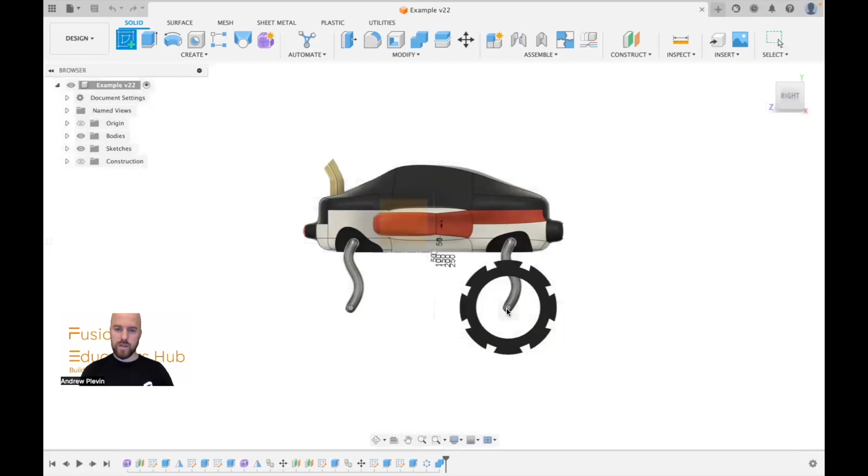Now that we've got the tyre done, we can start to work on the actual internal wheel and the trim. Again, same as before, we're going to create a sketch on the edge of this wheel axle. Zoom in and get it into position to make our lives a little bit easier.

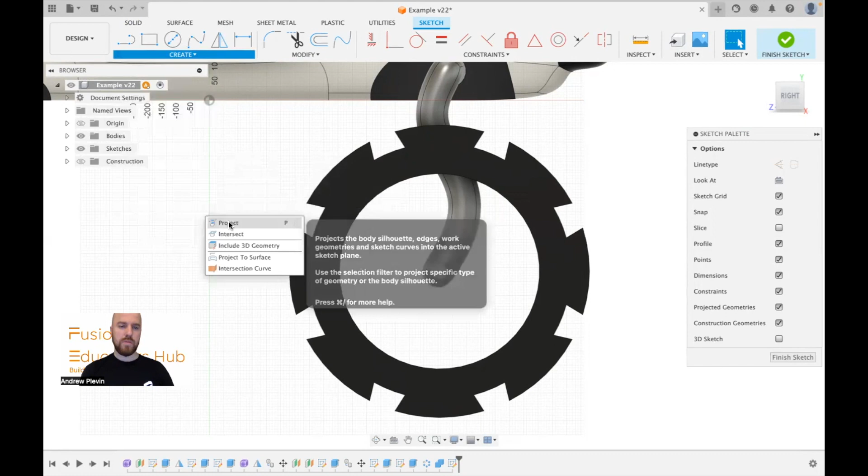We want to use some of these edges that already exist in this sketch. To do that, I'm going to go to create, project, and select those we want to include. We want the inner edge here and also this wheel axle. Click OK. Now we can use these within our sketch as actual sketch objects rather than just edges that exist on other bodies.

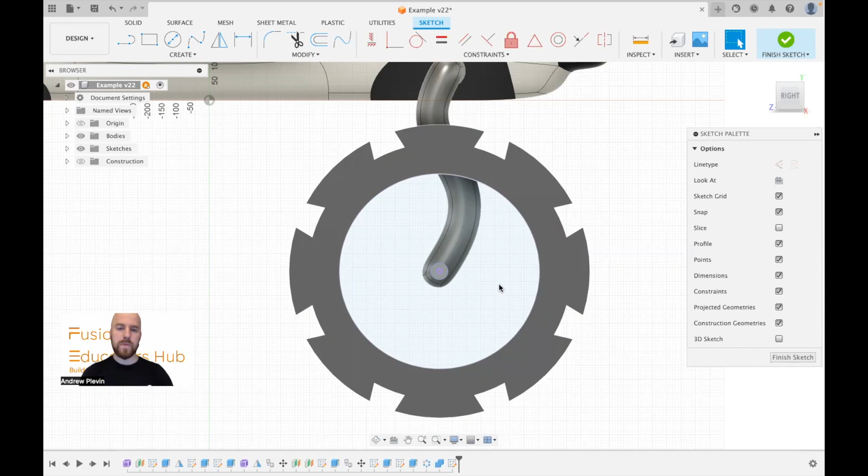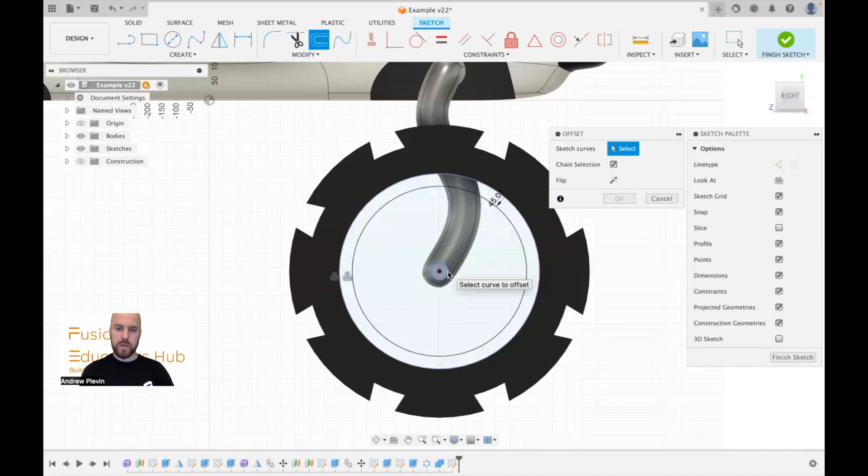So we're going to use the offset tool once again. We're going to create an internal offset just a little bit in, about 45, and click OK. Another offset, but this time an external one just on the outside of this wheel axle, and I'm going to go with about 35 for this one.

Now from here it's a bit similar to before, but this time the pattern is within the circles. So what we're actually doing now is creating the trims for the wheels, or as the kids on the streets call it, the rims. To do this, I'm going to create a line, making sure this is a center line because it's going to be used as a reference.

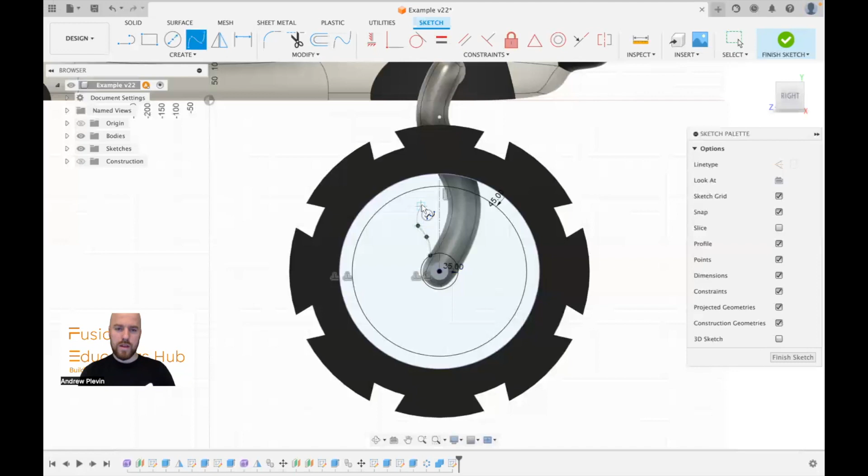Now I'm going to make sure that my first point is on the edge of this inner circle. I'm just going to drag it out and make a bit of a pattern in and around that center line, again making sure I join to that edge of that circle.

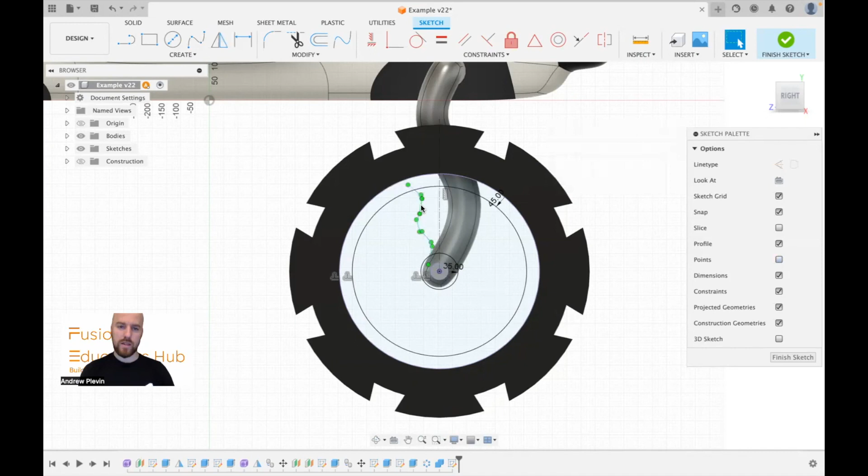From here, I'm going to use the mirror tool. Now this is where it becomes a bit complicated, a bit difficult to select, because there's loads of separate points along that spline. What we can do in our sketch palette is deselect points. Once those are turned off, it should be easier to just select the actual line itself. Once we've done that, we're just going to select that line.

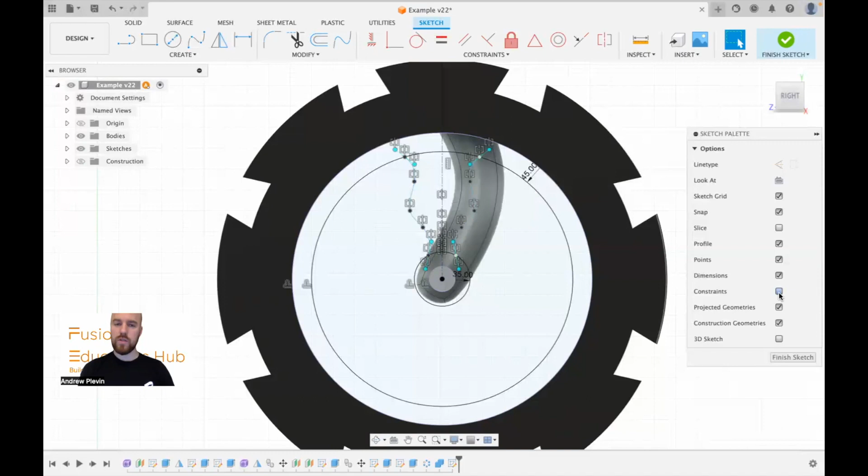Again, it's going to automatically select our mirror point, saving us some precious time there. Click OK. Now again, it's going to look a bit messy, a bit difficult to see, so I'm just going to turn constraints off. This time though, I'm actually going to create that circular pattern within the sketch environment.

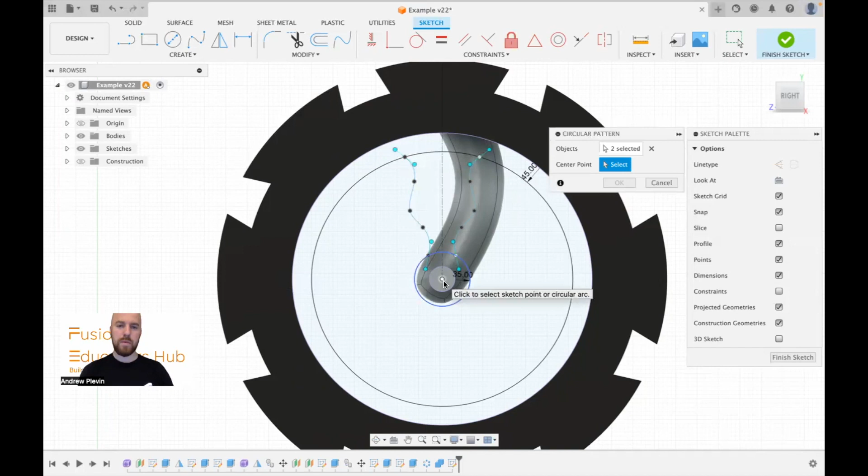To do that, let's go to create and select circular pattern. I'm going to select these two splines as our objects, and our center point is just going to be that point just there. Again, pick how many we'd like to have. I'm going to go with about 6, see how that looks.

No, I'm going to drop it down. I'm going to go with about 5 instead. Again, entirely up to you how many you have on yours. Click OK, and finish that sketch to come out of it.

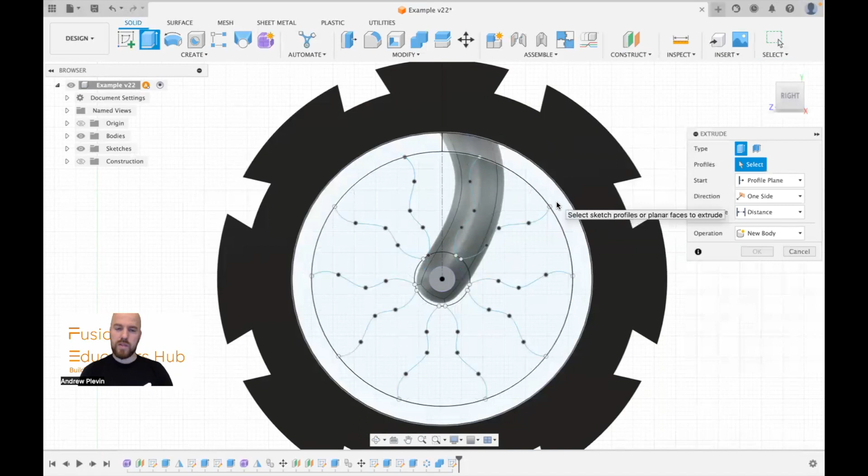You need to press E for extrude, and we need to select that outer rim, that internal one, and each of these vase-like shapes that we've created with our spline.

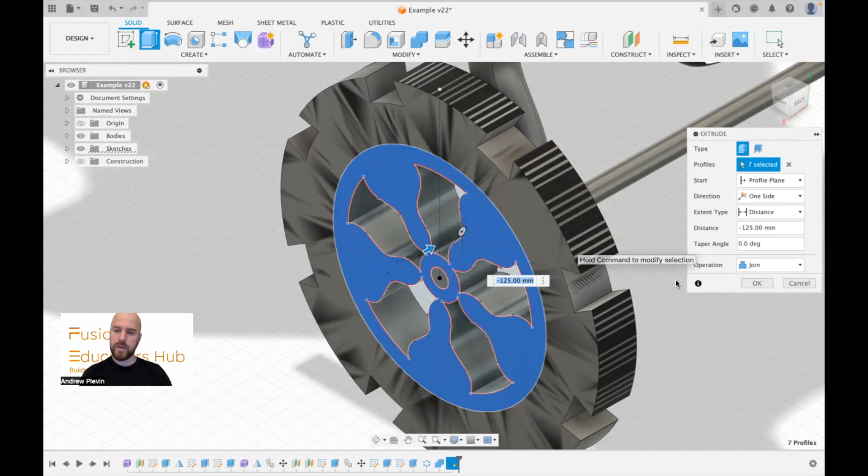Now from here, we need to go back by the same distance as our other one, which is -125. Again, as this is a separate body, I'm going to change that operation to new body.

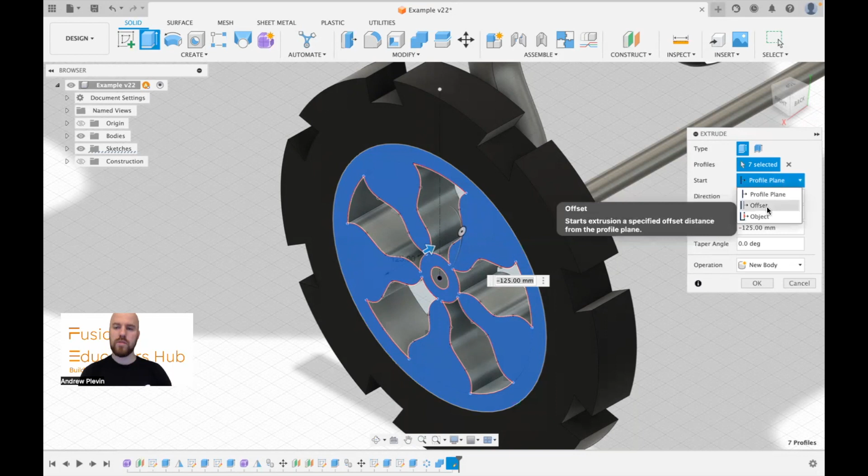Now, generally when you have a wheel trim like this, it doesn't come entirely the way out, it's usually set in just a little bit. So instead, I'm going to do this start with a slight offset. What I'm going to do with this offset is go for -10mm, which means I then need to bring this down by 10mm as well.

Click OK, and you now have a nice finished wheel with a nice rim, and also a tyre with a nice tread on it as well.

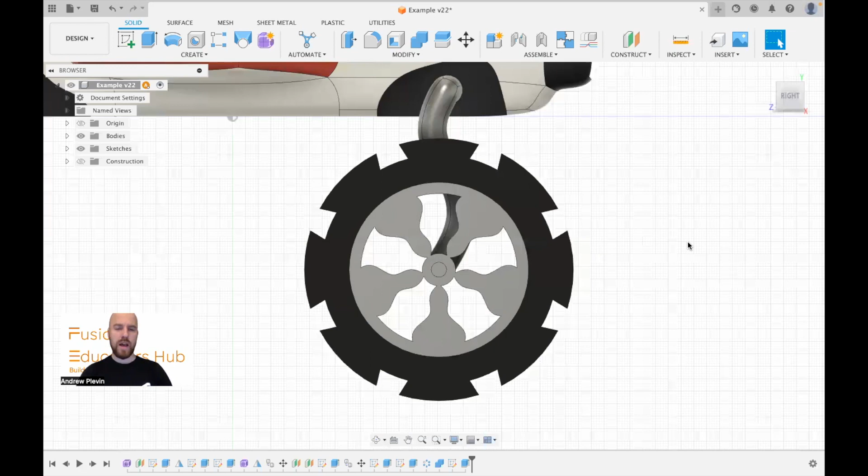In order to get all four, we just need to use the same principles as the previous video with the move copy. Select both of these bodies and do a point-to-point move.